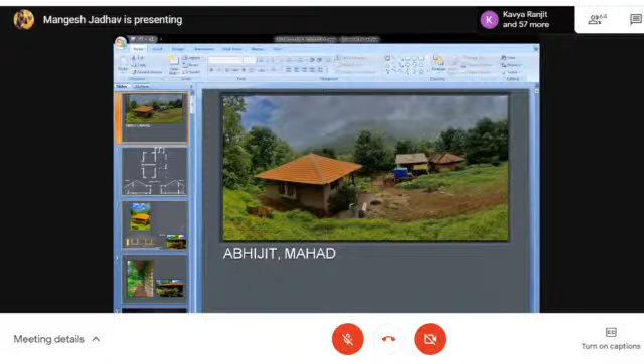Many organizations and companies linked to the world of architecture and construction are enhancing their digital presence through webinars that provide an in-depth look into their tools and products, allowing us to understand the function and feasibility of various products in the market. Previously, we've successfully conducted 9 webinars on various topics related to architecture, interior designing, and planning.

We've covered topics such as Understanding Aluminum Composite Panels by Mr. Faizer Ali Dastagar, Space Structures by architect Mahesh Mokha, Facility Management, an Emerging Field by Dr. Sarul Levy, Study from Home, The Ergonomic Aspects by Dr. Priyanka Depe, Bridging the Gap Between Academics and Design Industry by Mr. Rahul Kulkarni. Before we get into today's program, we would like to call upon Vaibhav Sir to say a few words.

Okay, thank you, Marika and Kalaivani. I would really like to welcome our new guest today. Me being into sustainability, I'm actually associated with a lot of people, and Mangesh sir is one of them. So today on the World Architecture Week, I would like to welcome people who are of a similar interest. So we have Mangesh sir.

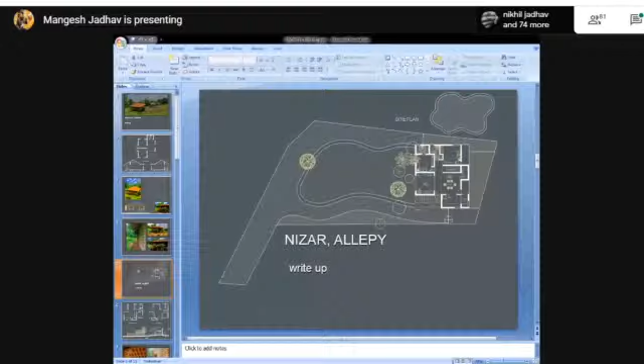I hope you can see the presentation right now. Yes, sir. The presentation is visible. It's on now, no? Yeah.

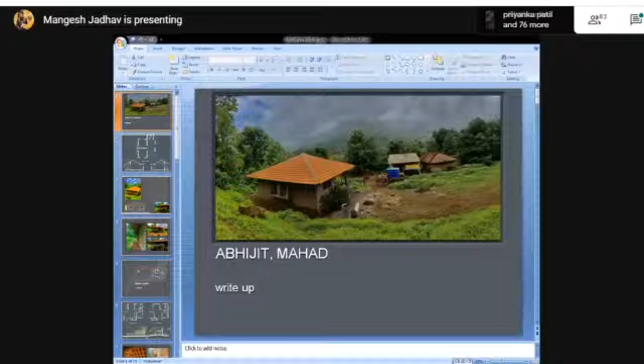Okay. So this was the house. I'll show you the plan of this. This was a very simple house. Can you see this? Yes, sir. Great. So this is a very, very small house with a very small footprint.

But this was ancestral land where the owner of the house, his son, wanted to build something for his father so that he could go and stay there once in a while. It's near Mahad, and the background is of a very, very big mountain, and also the Western Ghats which is there.

So just a basic veranda, and then this is the bakada. Bakada is a very traditional feature in these villages in Konkan. So it's like a cantilevered sit-out projection from the main wall. It's coming out, I'm moving my mouse also on that, and that's the feature which they wanted there. That detail is shown in this section over here,

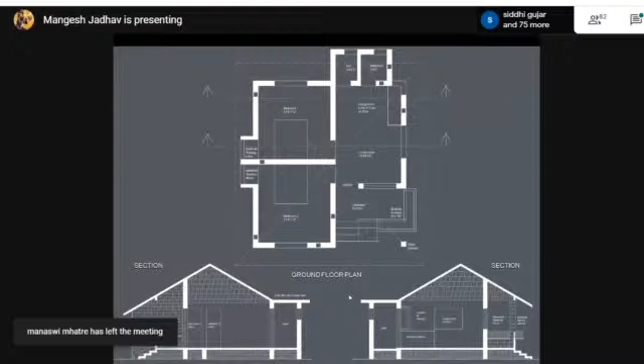and a typical pitched roof on all four sides with the toilet actually outside the house, and two small bedrooms, a living and a pantry. That's it. So they used to come there once in like 3 or 4 months, and that's what they wanted to use. So here what I've used is a basic laterite stone foundation, and the stone foundation we went just 2.5 feet deep.

So the cost of this structure, which the contractor initially quoted, was around 900. But when I told the techniques and all that, it came down to 800 rupees a square feet. That's the cost.

I mean, yeah. So that was the... So sorry, it's going behind.

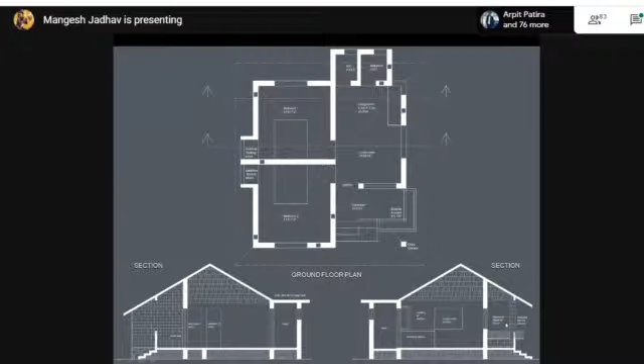Yeah. So that's the kind of bungalow, where it's situated, and you have the backdrop of the Western Ghats and a very simple laterite stone construction which we've used. The laterite was the only expensive part of the construction, and in the detail I try to use very simple brick and laterite combinations. The windows are very... yeah. And instead of recess pointing, we did a pointing which is protruding out that way.

So in this particular project the cost was very low, and we did the roof in MS because wood was not allowed. I mean, I was very unhappy with that, because if you see, the box sections are used here, and in those box sections we just used the Mangalore tiles. So all inclusive, the cost went that much. So this was done in 2016-17.

And this is Allepy. In this, I want to specifically share something very important with the students, because the way we have been taught construction, load-bearing construction for that matter, it's really not the way how it is. And this house is still standing since 2005. So that is a very simple plan.

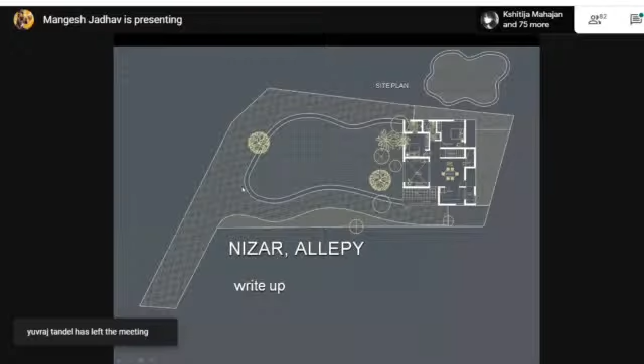That's the site. There's an entry to the site which is here, and we wanted to build the house at the end, because you could get some space to appreciate the entire house, rather than just build the house bang in the front. The client actually had an idea to build the house here in the front, where there were no trees. I said let us have it behind, so that when you're entering the site, you're getting a foreground, and you could have space to explore the view of the site. Yeah. So these are the drawings.

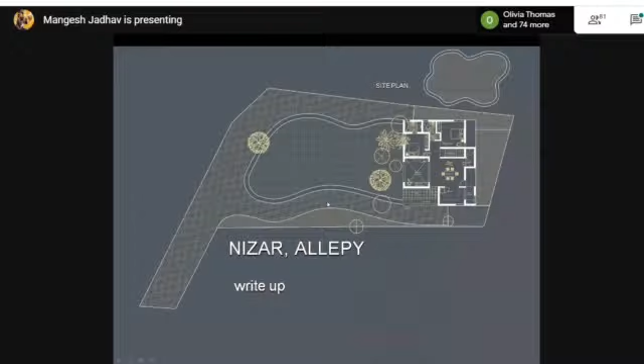So I do architecture plus interiors for all my projects. I don't do only architecture. That's how I've always been doing it. So there are these steps going down here. In the small niche which you get as soon as you enter from the entrance, you have this small niche for keeping your shoe rack, and that same niche is coming out.

In that niche, the depth of that niche, I've created these 3 steps going down to the living room, which is actually sunken down, and then again the jharokha which is there. This was done specifically so that the roof slope, which is huge, goes down to the living and down to the cantilevered part of the jharokha, which was later added on.

By introducing this cantilevered jharokha, the height reduced, and inside that space we had a loft and storage created. There was a dormer window overlooking the space with the TV and all built-in furniture. You see this small couch here, that's also built into the living room.

Then there's a huge ledge there. On that ledge you can have the television you need. Of course, in 2005 we had a television, no plasma and all that. So there's a space for his lamp and all that he could keep.

On one side there's a sit-out here, inbuilt again, cast in situ in ferro cement, and this side also in a step. So you have an L-shaped seating pattern, and in between that there was a space for steps as soon as you enter.

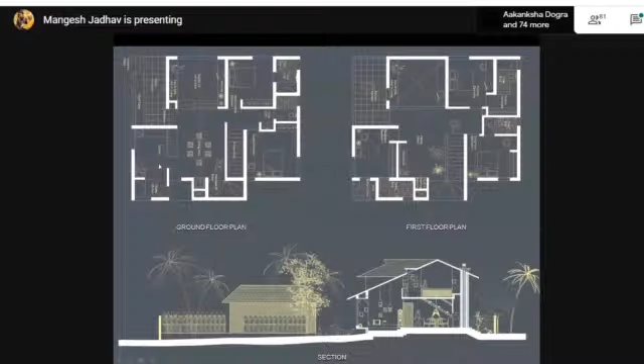Sure, sir. Mangesh, just a minute. If you go back to the plan - I'm disturbing you in between, but before you go forward, can you say it was in Kerala? So there's a lot of humidity, so we need a lot of ventilation or airflow. Can you just tell the students about the ventilation part, what you did in that area? Good question, very good question. But you'll have to go back a bit. I'll go back, no worries.

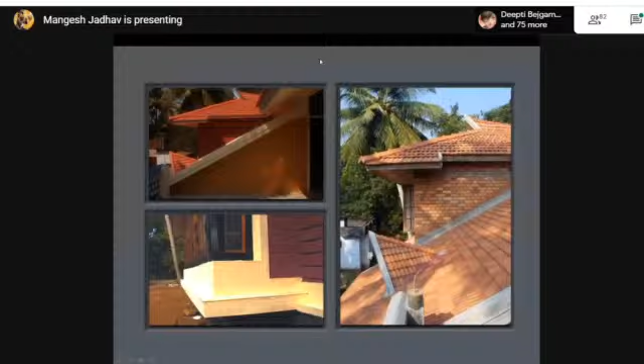So what we did was, if you see in the photograph or section - I don't know, but on site we have done it. What we have done at every level in the room, one of the pictures which is there. What we do is very typical of Kerala. What they do in section, if you see, there are a few more sections. I'll open those sections, there's another drawing of this. There's only one section which is here with me. I can probably open the AutoCAD in some time till I talk about how the... so what happens in Kerala?

Yeah, there you can see. Can you see this slide right now? Where in this the filler slab is there and this red color wall which is there. Right now, this slide - so if you see, there's a slit here, above the window. That white line which you see, that's not the tube light, by the way - there's an LED, a CFL lamp on the right hand side of the window, and above the window there is this slit which is there. Do you see that slit? I don't know whether Vaibhav sir, can you see that slit?

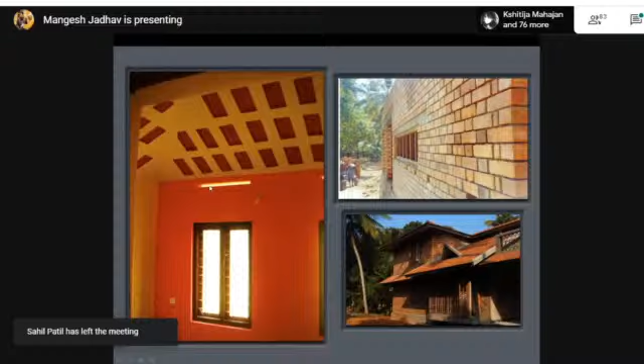Yes, it is visible. So this slit which is there, that is a very typical feature in Kerala - the window only, it is there. So from the window the wind comes inside, and from the slit the hot air goes outside. So that is a slit, and outside the slit what they do also - this is everywhere in Kerala. And outside the slit, to avoid insects, lizards and all that coming inside the house, they have this jali which is there, so mosquitoes also don't come. But this is a must feature, and this is like typical detailing in what they do there. And to avoid water also coming inside - the sloping slab, I have done a sloping slab, but other people in Kerala, they do a lot of flat slab, so they take the flat slab at least 1 foot outside so that the water doesn't come. It's like a chhaja for that opening, which is this wide opening you see there.

So that is one. The other thing we do is that a lot of opening, dormer is there, so from that dormer you have hot air vents going up. But this typical feature works very well - above the window there is this slit, and the size of the slit I'll tell you - not more than 3 to 4 inches, that is the height of the brick. In the rat trap bond you do it 4 inches, in a normal horizontal bond you do it 3 inches. So that one brick is completely removed in that whole area, and above that the slab reinforcement is there, so that slit is very easy to do. It works very well. But if anybody is a Keralite in this session, you can always check in your own houses in Kerala that this feature is there everywhere.

You see that - so that is the only feature which I have used here. So this is the filler slab which I have done, this reduced the cost like anything. So there's only one reinforcement here. There are drawings also of the filler slab which we've done to make it more accessible and understandable to the contractor who was there. The contractor was very good, but still he did it at 1,000 rupees a square feet, with this kind of quality in the construction he's done there. So that is actually how I wanted - if you see this picture, without even painting. But then clients are crazy. This is how even Laurie Baker does it. This is what I've done on site.

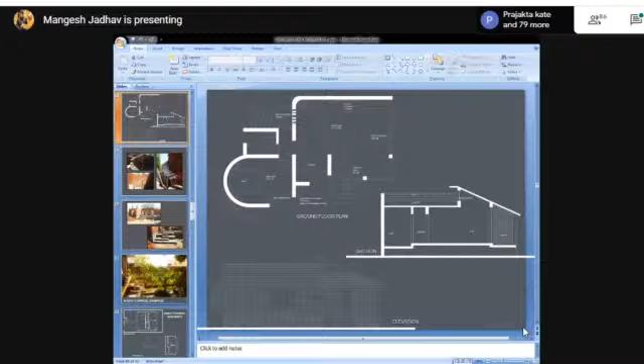I have some pictures of that. These were actually cast in situ slabs inserted into the wall, and this was done in local bricks. I tried to use a rat trap bond, so the size of the brick is actually 6 inches by 4 inches by 8 inches - a very odd size. It was inserted inside the wall and then plastered from inside, while from outside it was exposed.

From outside you can see there's a proper glue, and then we clean all the bricks. The only thing you have to take care of with exposed brick structures is that the overhang of the roof or chajja above the brickwork has to be at least 2 to 2.5 feet minimum. 3 feet is best, but if you don't do that, the brickwork gets spoiled.

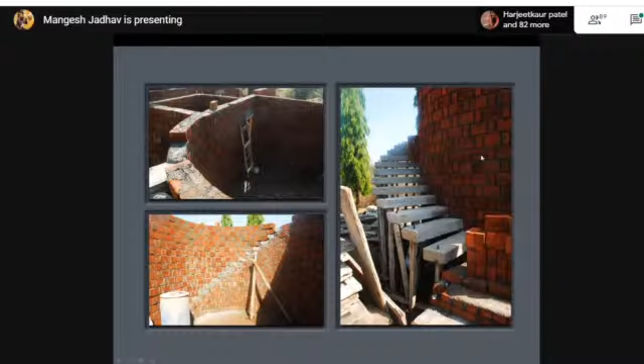Then that was the steps which we tried to use there, and these are all under-construction pictures with local bricks. This was again a very cost-effective structure where we did the whole house in just 9 lakhs, the entire house, and we in fact tried to get one more bedroom also. So the kitchen was shifted here later on during construction, and as-built drawings are yet to be made.

I'll show you the other part of the as-built drawings of this structure. This was done in Badlapur, with a stone foundation done 3 feet above the ground, and you have 1, 2, 3, 4, 5, 6 steps. 6 steps at 15 each is 90, which is about 3 feet around, and you have all these various elements.

The first layer is with vertical bricks to take all the load of the foundation, and below that we have done a ring beam also, a simple ring beam which reduces the cost quite a lot of the entire structure, rather than doing RCC structures where it's not required for ground floor houses. This was the first house which I did, and I'll show you this one.

The plan of the house is this. This was actually one of the projects which Vaibhav was talking about. This is in Pali. This became quite a good example, and this was done at around 1,400 rupees a square feet.

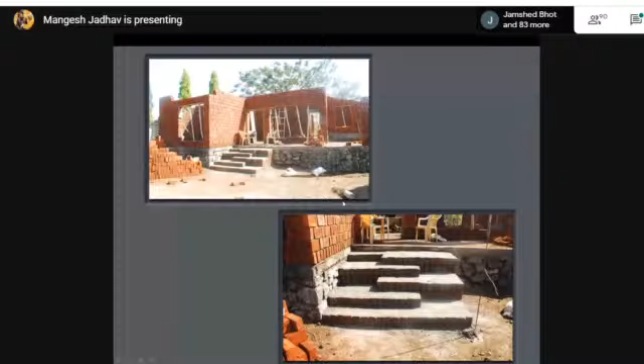The entire design includes a bullock cart window which we tried to introduce - this idea I actually got when I was in Auroville. There was one place where we used a bullock cart wheel as the entrance window besides the main door. So that was the bullock cart wheel we used, and around that we built an arch, a full arch, full circle.

Again, the idea of having a corner window for the kitchen which we've used here in the ground floor plan, you can see that. The platform is huge, at least 13 feet, in full length, where at the end you have the basin, a common toilet, the bedroom, and all the wardrobes are in niches. One side the wardrobe is to this bedroom, the other side the wardrobe is in this one.

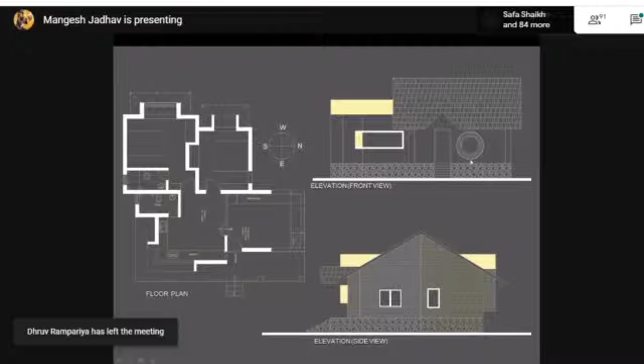And then both of them have jharokas which have a sitter.